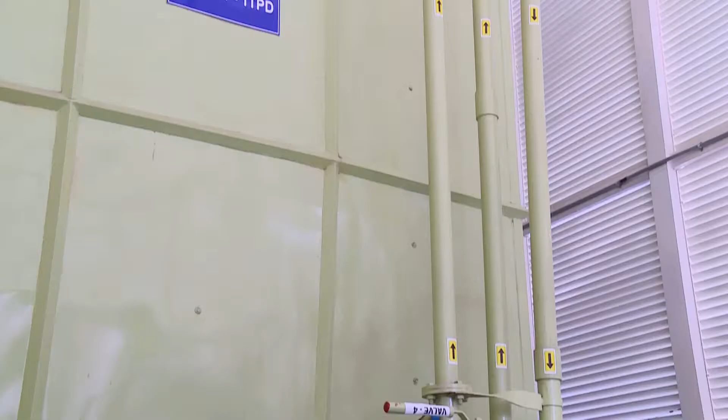Almost immediately, the Green Initiatives team at Infosys used this experience to commission plants for the Pocharam campus in Hyderabad, DC and Bhubaneswar. This time around, a technology called the continuous stirred tank reactor, which used the wet digestion method, was implemented. This technology was a standard offering from the market, and the team soon realized that several value additions could be made to utilize it better.

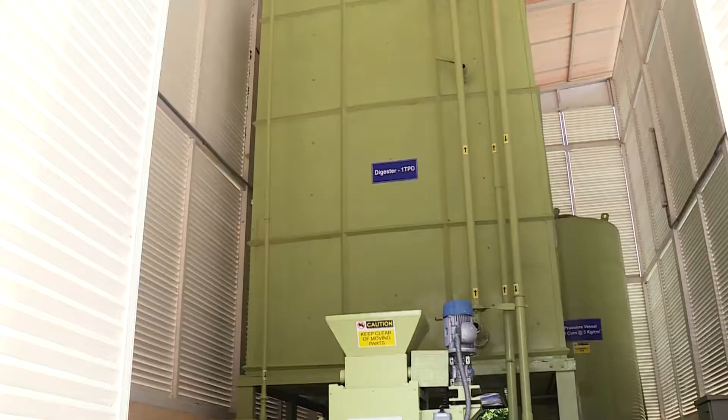The improved plants were soon installed in Hyderabad, Gachibowli, Pune and Trivandrum. This wasn't enough for us. We knew we could have better biogas plants. We did search for them in the market for efficient ones. When we didn't find any, we decided to build ourselves.

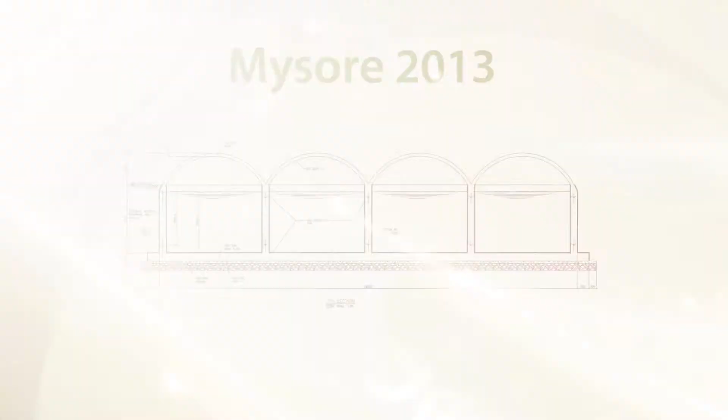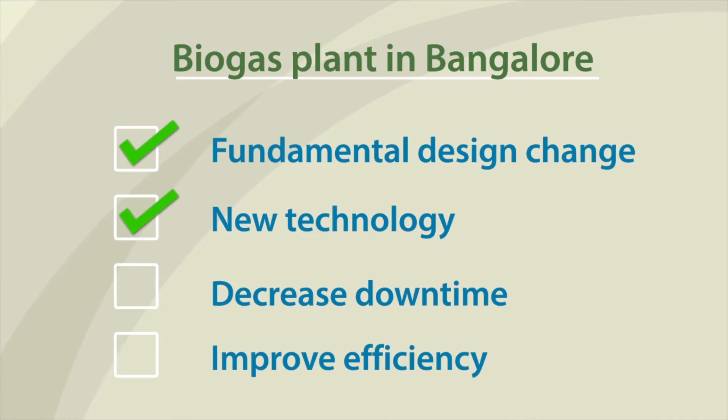And so work began to customize a biogas plant for the Electronic City campus in Bangalore. This time around, the Green Initiatives team was armed with a list of must-haves. The design needed a fundamental change, as did the technology. Downtime had to be decreased while at the same time improving efficiencies.

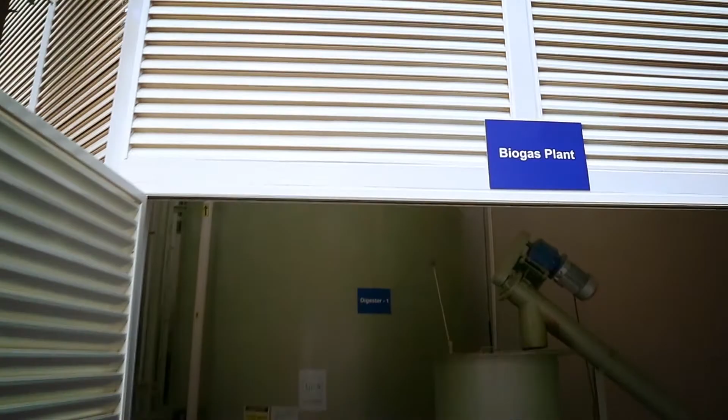Bangalore DC's biogas plant has the smallest footprint compared to any of our other DC biogas plants. A typical biogas plant that you would see, like we have in Pune or Hyderabad, is actually a cuboidal shaped biogas plant. It's like a box, right? And when you see a box, it has 8 corners where the food waste can't reach.

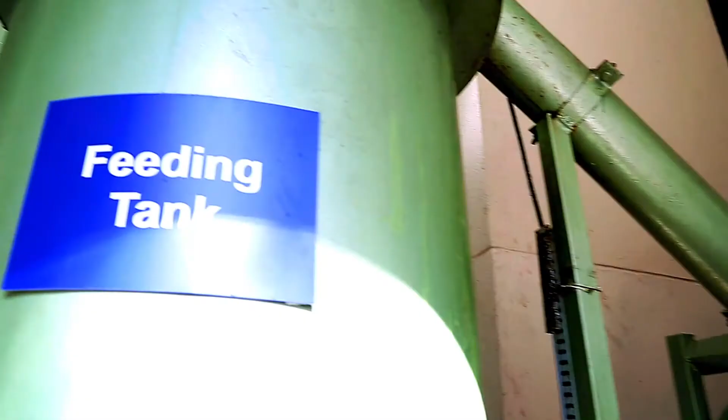So we redesigned the entire model with the vendors. We made it like a cylinder. So what happens in a cylinder, it's easy to mix and it becomes more stable.

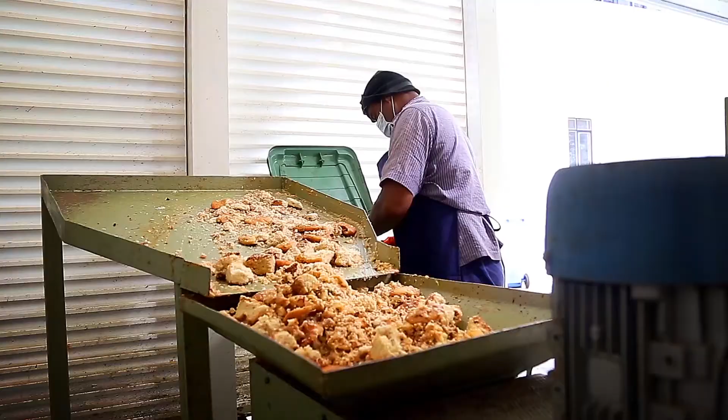We've tried to move away from a batch feeding system to a continuous feeding system. So we have this hydraulic table on which the waste drums are placed. They go onto this particular table. This is the sorting table. We shred them into small pieces.

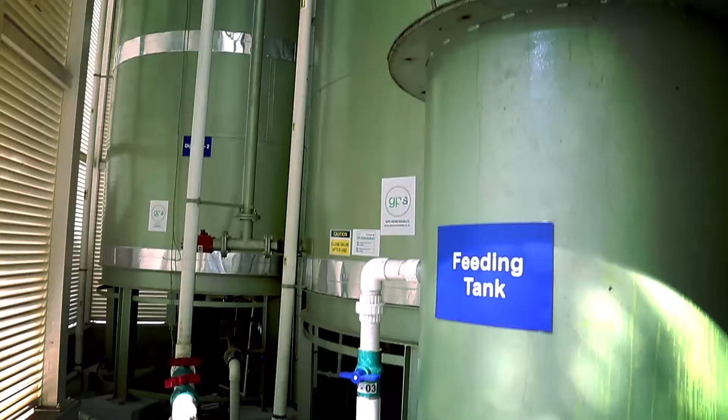Simultaneously, this particular system, it's a screw conveyor. It takes the shredded waste into the digester. So here, what happens is the food stays for 32 days before it gets completely converted into biogas.

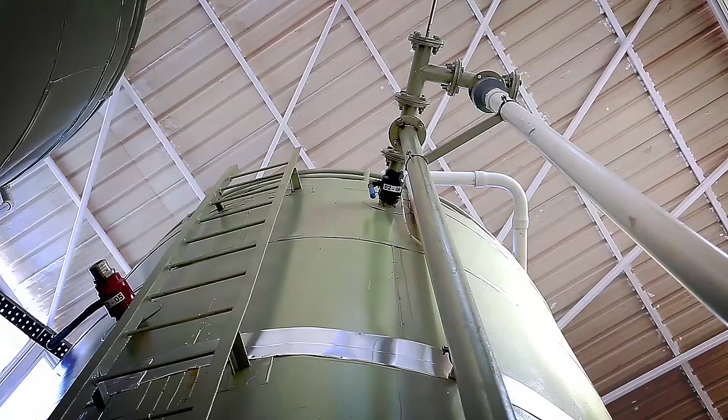The way we've designed this is every day we feed 1,000 liters of food waste. In the core of the digester, we are heating it at 39 degrees Celsius. So this is a conducive environment for the bacteria. They're more active and they start producing more biogas.

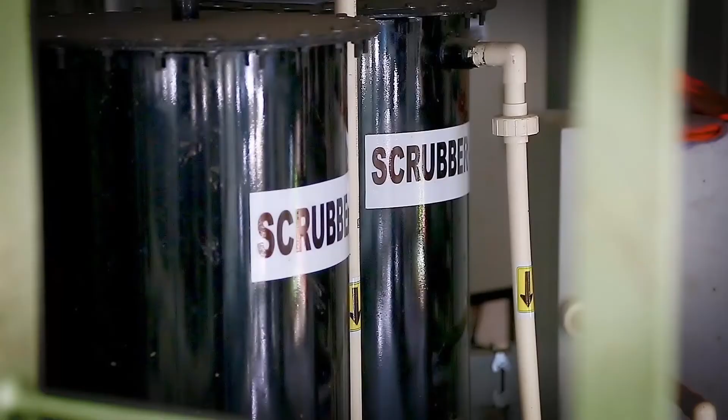So once the gas is produced, the gas is not clean. It has moisture and other gases. So we pass it through 2 scrubbing units. And using an automated valve system, we start pushing the gas into these balloon towers. It's sensed by a sensor and the compressor starts compressing the gas into a pressure vessel.

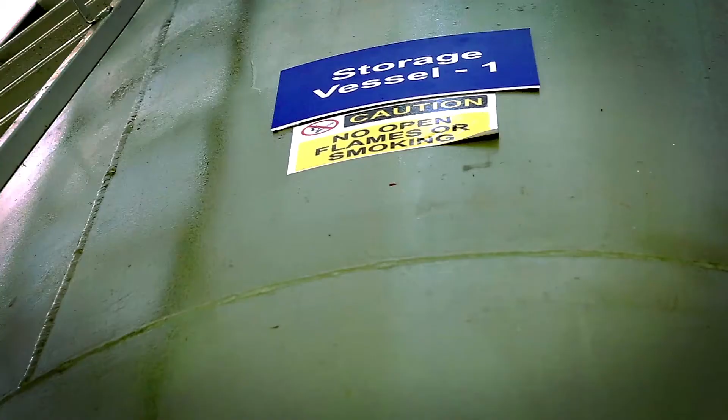This particular system that you see here has a lot of electronics and microprocessors in it, where it controls the entire plant for 2 things. One is to maintain the plant, the automated gas flaring system, that is the safety of it. So this way we are able to report all the safety measures and monitor the health of the biogas plant online.

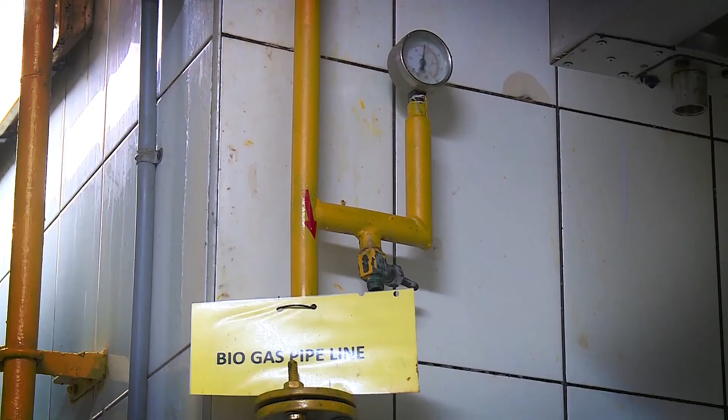So one important aspect is to treat the food waste, but the second is to use the gas as well. We went ahead and customized far infrared burners, which are very high efficient when it comes to gas usage, but it also delivers a very high performance compared to a regular biogas burner.

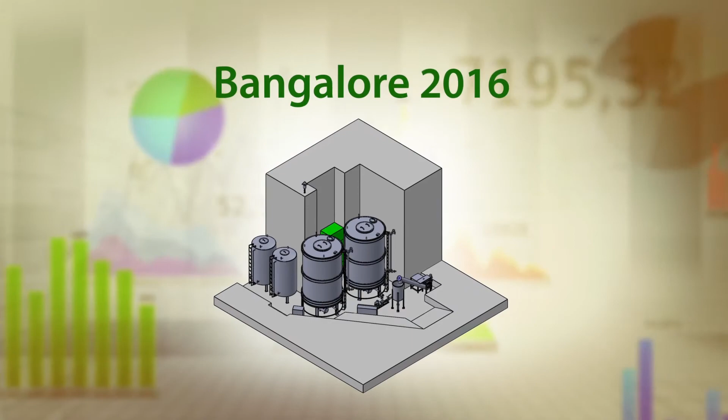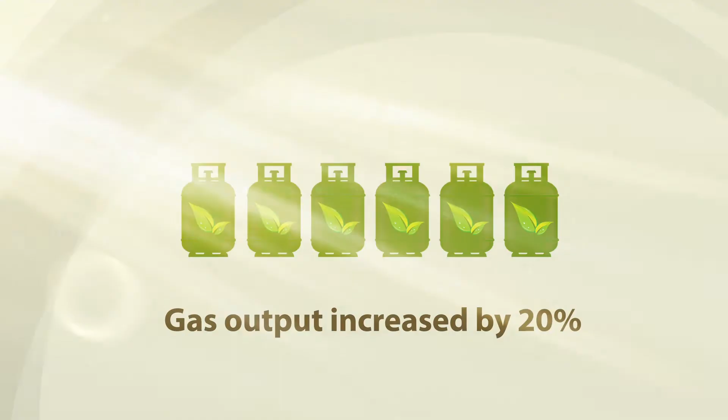So here's a quick look at the numbers the new plant translates to. Since the plant was commissioned in March 2016, an overall energy saving of 20% has been observed. The time spent feeding the plant has reduced by 30%. Gas output has increased by 20%. There has been a 25% increase in usage due to the customized far infrared burners.

So we're not stopping here. We're going back to Mysore, where our learnings began. And we're going to build the most superior and efficient biogas plants at Infosys.